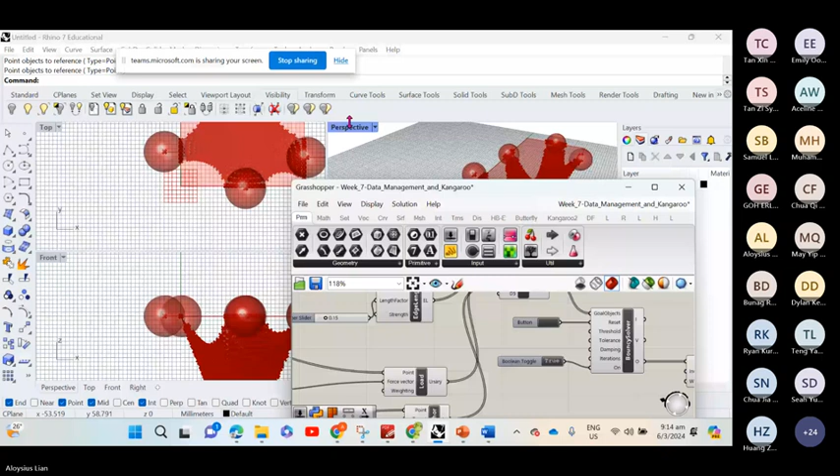Okay, so to make it visually interesting for you all, this is what you will learn at the end of the lesson. This is a Kangaroo simulation. Essentially, you will learn how to do this kind of simulation, form finding exercise.

Physics simulation means that it will just react to the physical world elements, for example, gravity, simple forces. We will share with you how to do Karamba later on - that is a more precise structural analysis tool.

So this is a parametric system. I can move this angle to here, and I can reset the analysis. This can be useful for landscape design students, right? You can make a nice slope design. We can always reverse the direction and make it positive so that it becomes a structure instead.

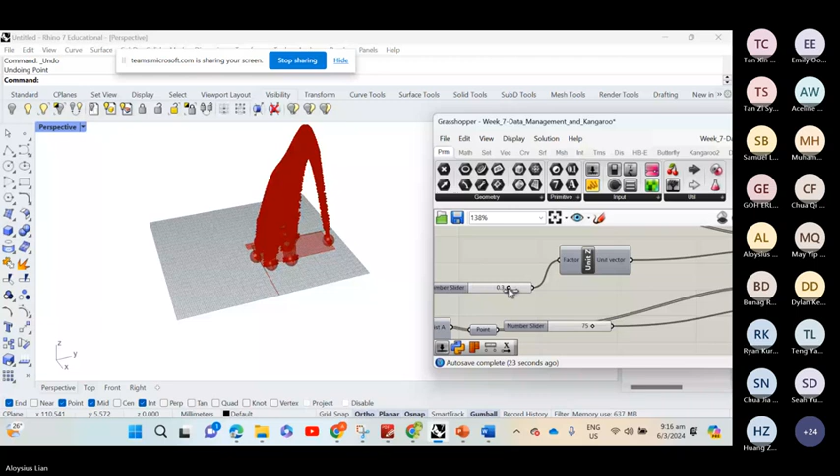Maybe this is too strong. Yeah, and you can see this kind of interesting results. So you can reset the simulation again.

Towards the end, you can really directly make this into an architectural element. So if I were to enable this now, you'll be able to see the structure. So this will be the completed structure based off on your analysis.

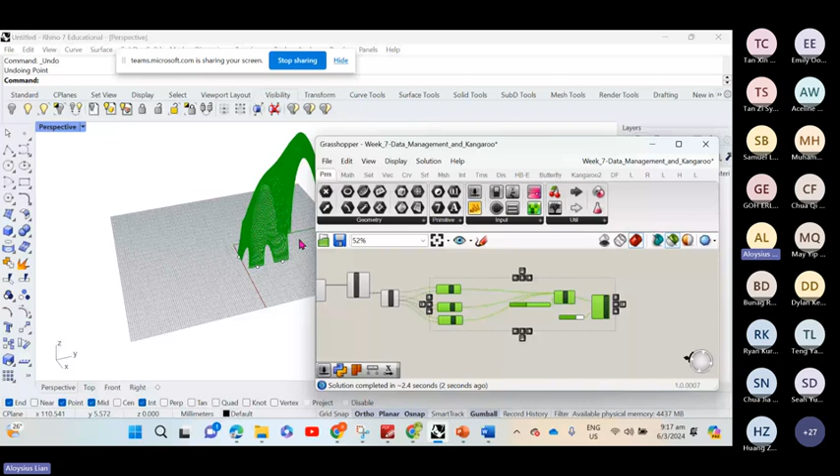Something similar to what we have learned from the Esplanade cum Jewel lesson, right? And then that is the end result of the lesson.

But the first part that we will go through very patiently and slowly as requested is the data management. Because, for example, now we have created so many pipes and structures, right? So how are we going to manage them for fabrication, for data?

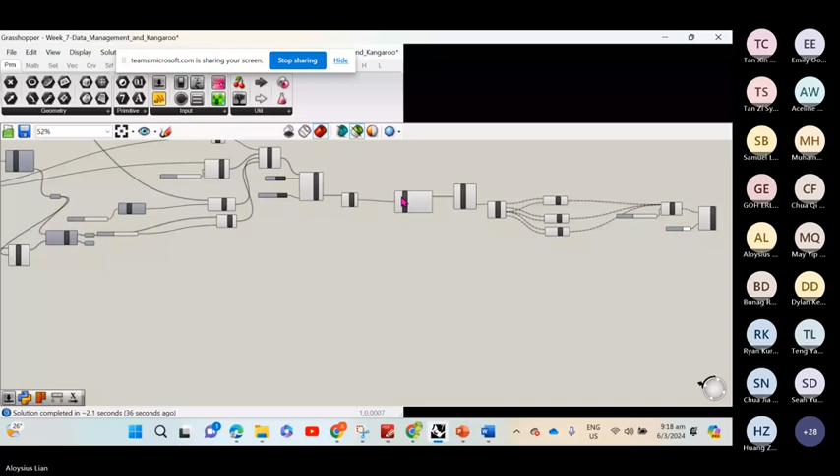My computer is hanging because there are too many elements. Let me just disable it quickly. Okay, so now it should be faster.

So the first part of our lesson will be about the data structures - how to generate a series of points, and then after that, read and write and create a list of points that will generate our landscape over here.

So during the hands-on in a few minutes' time, we will create a rectangle. We will make the rectangle a mesh, export the XYZ values to it, and then after that, use Excel to randomize the heights of the points. And we will read these new values from Excel into Grasshopper and then create this mesh.

So why am I doing this roundabout way? Because you may have your XYZ values from somewhere else - for example, you have it from a point cloud that you receive from a surveyor. So you can ask your surveyor to give it to you as a CSV file, and then you can directly translate that into a terrain in your Grasshopper or Rhino model. Okay, clear?

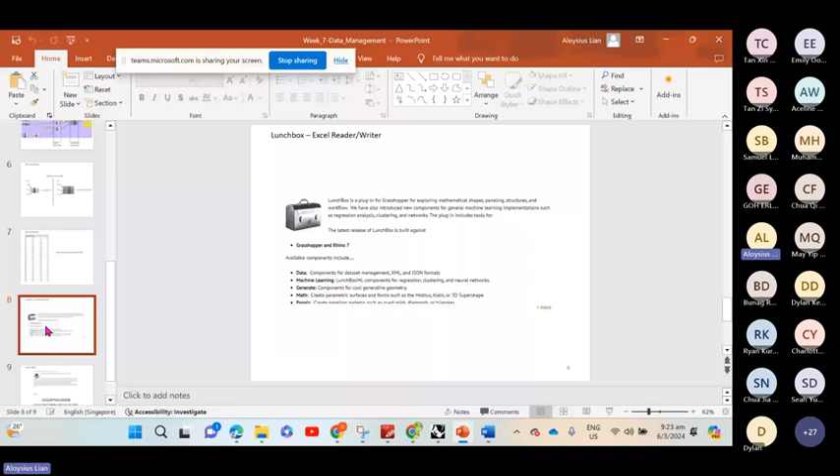There is a plugin called Lunchbox which automates this for you. But we teach you the fundamentals so that if you don't have access to a plugin, you can still do it from vanilla Grasshopper. At certain firms, there may be system administrator issues preventing you from downloading plugins. So to circumvent that, if you use the vanilla installation, you can still operate as is.

There are other plugins available, for example Bumblebee, but this is not supported recently. I think he has moved on with his life. As of now, I think it only supports up to Rhino 6. So when you use it in Rhino 7, it can still be done, but not so smoothly. There may be some bugs.

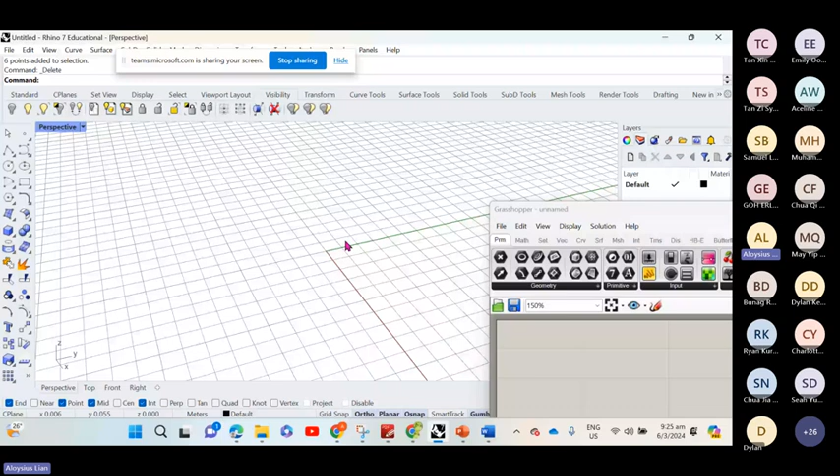Make sure that in your Rhino file, your units are in meters. Type units, then meters. Make sure that meters is selected, and click OK.

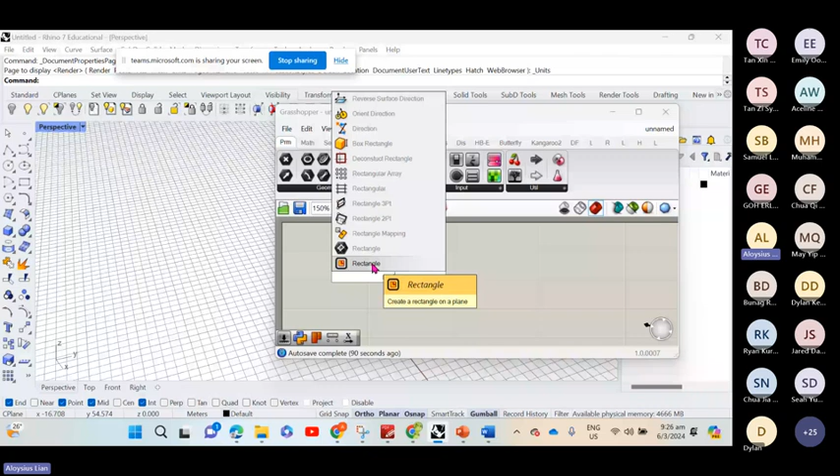Everyone have this? Now we move on to Grasshopper. Double click on the canvas and type rectangle. Choose the last icon, where it shows a black border around an orange color square, even though it says rectangle. Click on that button and you will see this come up. It needs a plane. The default plane is already the XY plane. What we are going to do now is change the X and Y size.

I will input 30 meters for X. I double click on the canvas and connect it to X. So we have 30 meters to the X direction, and 60 meters in the Y direction. Just double click, press 60, and connect.

I will zoom out, and now you will see a rectangle that is 30 meters in X and 60 meters in Y.

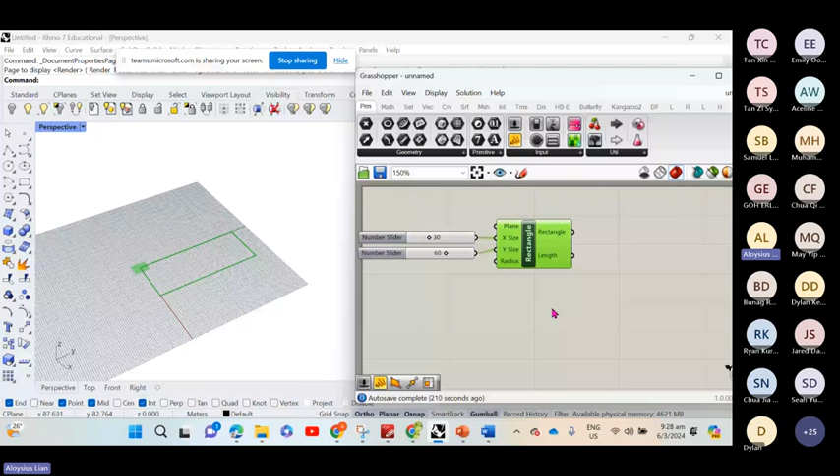As I've explained before, we are just creating a generic rectangle and a generic mesh from the rectangle so that we can export. Oh, why you frown? Don't frown, girl, you get wrinkles. Too fast? I'm really trying my very best to be uncle-ish and slow while not making you sleep. She was frowning very intensely, like questioning why the rectangle must be 30 by 60.

Everyone have rectangle now? We are going to do mesh plane. Create a mesh plane. There's two options here - this one is trying to catfish you, don't choose that. Choose the second one, without the vertical thing in between.

So this is the mesh plane. What you need to do now is connect the rectangle to the boundary. This allows you to calibrate how many mesh subdivisions you want within the width and height.

I'm just going to be lazy now, I'll move this down. And I connect this, the same X to the same width, the same Y to the same height.

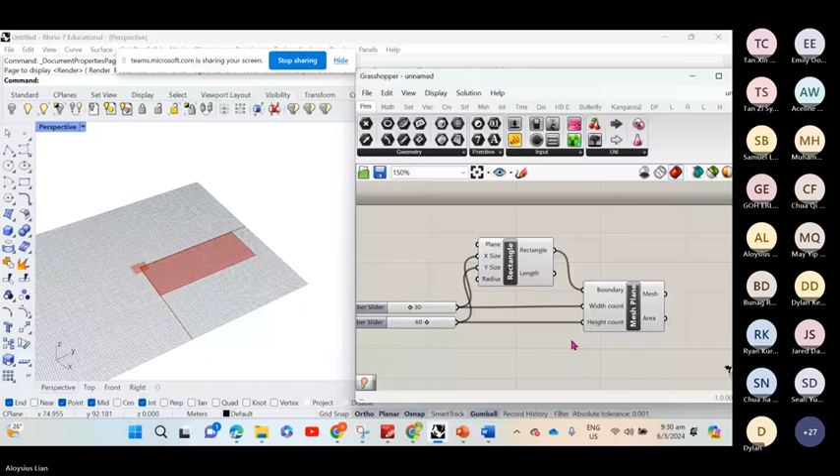I repeat: double click, type mesh plane. Don't choose this one, choose this one with the orange rectangle. Then connect the rectangle here to the boundary, and the same X to width and the same Y to the height. Everyone okay? Same thing as throughout the semester, your TAs are your friends. If you don't know, just raise your hand and they will come to you.

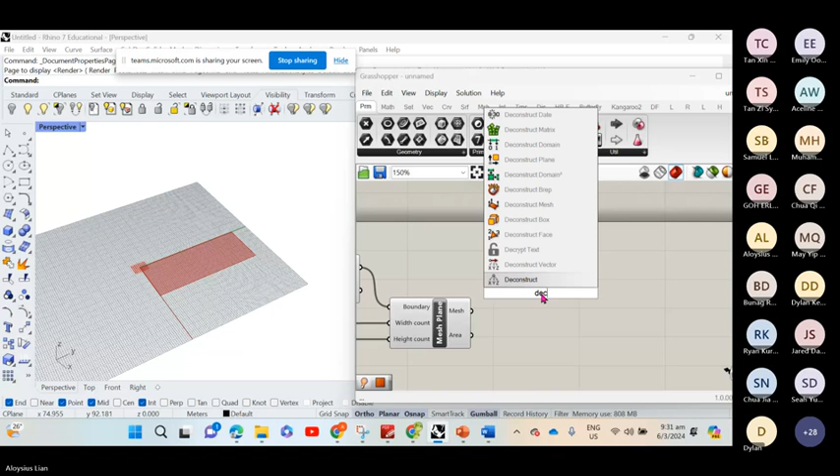Now what we are going to introduce is this command called deconstruct mesh. It is very similar to the same concept we told you before for the explode tutorial, the deconstruct BREP - it's just a different geometry, but you are still deconstructing it. Click on this and connect your new mesh plane to your deconstruct mesh.

If you were to zoom in now, you will see essentially that whatever is on the mesh plane is now on your deconstruct mesh in terms of the vertices. It has divided it by 30 divisions here and 60 divisions here, in 1 meter intervals - that's why my grid here is 1 meter.

Okay. So, why we want to do this thing is because we want to just get XYZ points. I've just created a panel and connected it to the vertices. Okay, so now this is giving you all the X, Y, and Z values of each of the points that we have generated. So the first thing here is X. The second thing here is Y, and the third thing here is Z.

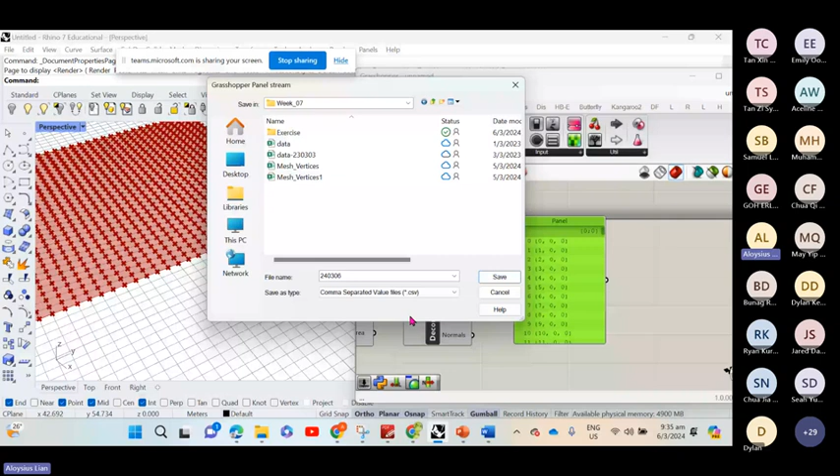Okay, but this does not create the new file now. It does not exist here in this folder that I've just said that it will. What you need to do is you have to still do this next step, which is to right click and then stream the contents. Now I click here. If I were to go back over to this, you will now see that my CSV file has been created. So within a very quick 5 minutes, you have already done some data management, because you exported a data file.

When you double click on a CSV file, Microsoft Excel will naturally detect it and separate all the commas into the columns. So now when I double click on this file, you can see that it has exported the information. And why I say this is a negative demonstration is because if you were to scrutinize, the values for column A and column C are not so right. You will see that there is a curly bracket. Because the computer is strictly by the book. Whatever is on the left and right hand side of the comma, it will separate. If it's a curly brace, it will also separate. It doesn't know that this is just a bracket to contain the XYZ value of a particular point. So this is where we need to do some data management, data sifting, and data splitting.

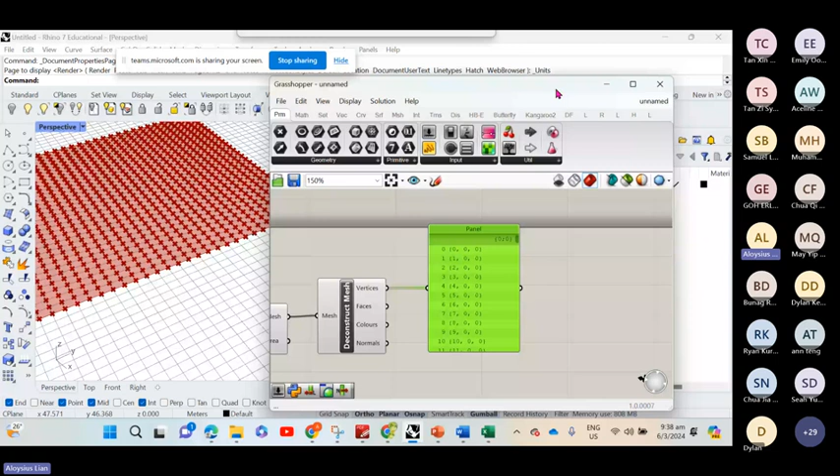At any point of time, if you are confused, you can go back to the file here. It's on the top. My data management part is on the top here. From this end onwards, deconstruct mesh, then we will deconstruct the vertices, the point to XYZ, and then we will concatenate, we merge, and then we will read the file. Oops. Okay, I go back here. Everybody okay? All have this CSV file? So I'm going to close this now, and then I can move it up.

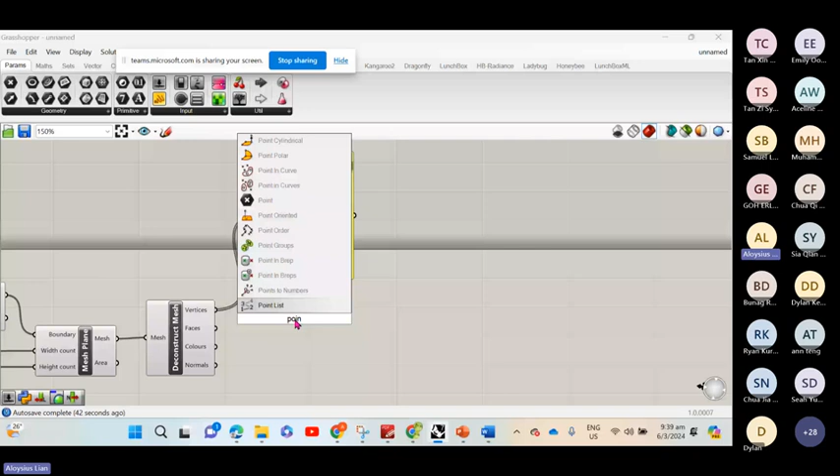So we already said this is a negative demonstration. So we want to convert it into just the XYZ point. To do that, we need the deconstruct point. Yeah, this one. Deconstruct a point into its component parts. You click on this, and then now you connect. I will just open a panel and connect this here. So now you will see that you take all the X values, then all the Y values, which don't increase, as well as the Z values. Okay? Can?

So now this information, we need to label it, correct? Because, for example, if you create this CSV file, you may forget what these values are, what the first column, second column, and third column are. So you will need to create a header for this. So I'm going to make a panel, and I double click, and I just call this X, Y, and Z. Then click outside. Don't press enter, because when you press enter, it will make it into a new list.

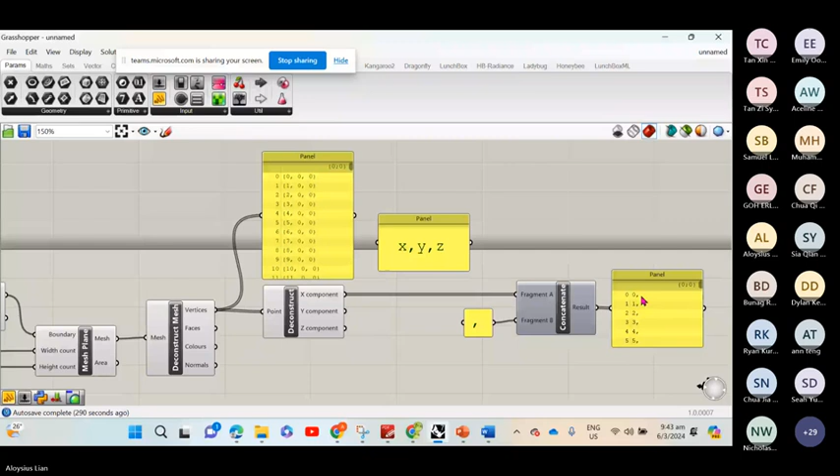I will reduce this, and I'll put this here. Now let's see what happens. Okay, I'll just show you. I create a panel. You see, it will add a comma behind every value here. Understand? So this is what concatenate does.

Now, you can zoom in to your concatenate. Then you can click on this little plus thing. You will add in another input. Okay. So I will connect my Y over to here. Do you notice what has happened now? It has added the other column of values in.

Okay. Then now you zoom in and you add plus again. Now I just want to connect. I zoom out. Okay. I also need a comma here, right? After my Y column. Makes sense, right? So I will use my same comma here and connect to this. And you notice what has happened? It has added another comma here.

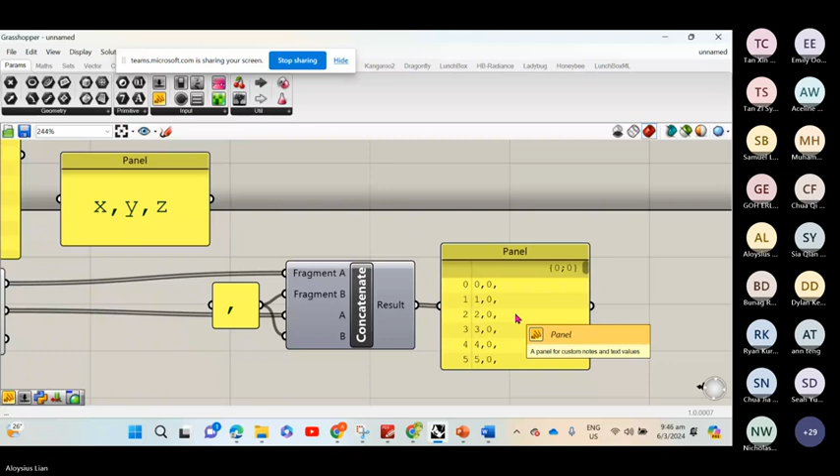Okay? All okay. So now I will zoom in. The next step is quite obvious, right? I will add another input. And I will simply need to add my Z as a C input now. Okay? So now you get what we wanted, right? Without the curly braces, and I'll move this here.

Okay. So what is happening now, and just to let you all understand about data structures in Grasshopper, right? Do you notice this funny thing here, 0, then semicolon 0? By default, Grasshopper always tries to make this into branches, so to say. Okay, this may be a bit abstract. I'm going to use this thing to show you. Double click on the canvas and type param viewer.

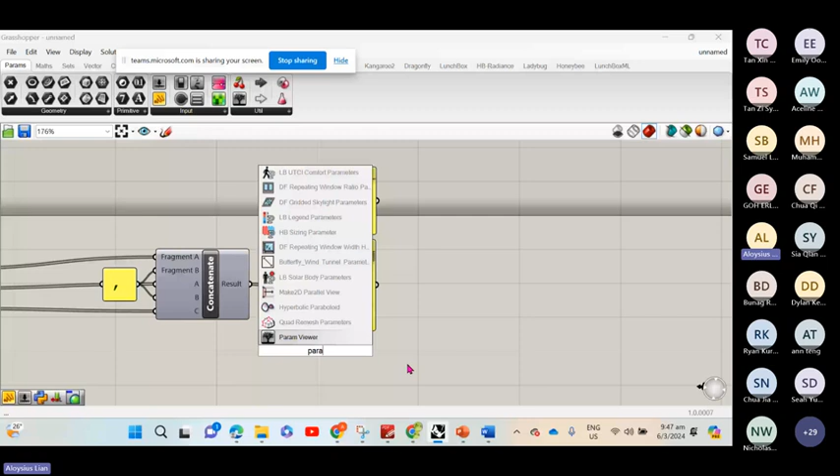Later we will come to this when we have more data. Okay, so you should see this thing. Connect this over to here. Okay, so this is what I mean by data with one branch. By default, I'm just going to make it even more visually appealing. You right click and you click on draw tree. This is what is happening.

Okay, by default, Grasshopper always tries to make your data into a tree, a data tree. There is a branch for this. But technically, you don't need to have this as a data tree. When you right click and simplify, this thing will still be the same. Okay, because this is already in its simplest form.

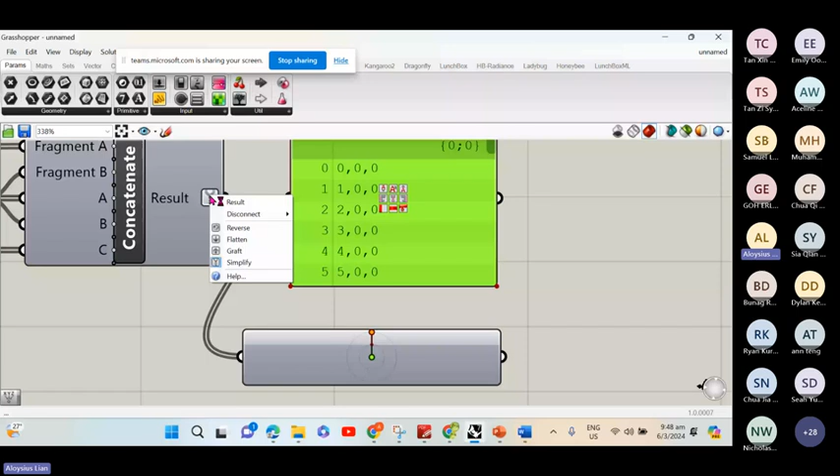Later on, when we go to more complex data structures, you will see this portion becoming really like a tree. Let me scribble. You will see things like this, and this, and then another data. And then from here, it can even branch off to further data. This is especially true for

our Esplanade tutorial. Because in our Esplanade tutorial, remember the time when I showed you all the example, we focus on one item in the deconstruct BREP. And then when I override that, the whole surface is proliferated with the sunshade. It's the same thing. What we have done for that example is we focus on one part. Once you finish this, all the branches will be applied to.

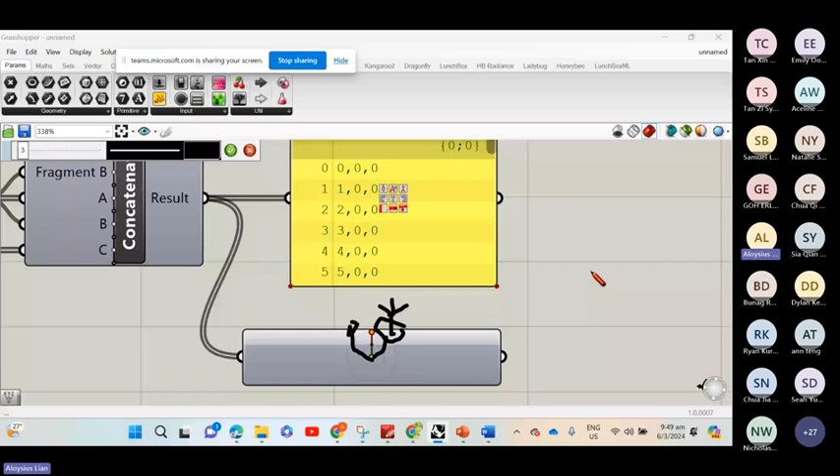Okay, this one is still very abstract, but never mind. We will come to that later, and then you all will be able to understand visually. So why do I show you this? Because now what is happening is there is one stream of information here and one stream of information here. We want to merge them together.

Okay, so we will use the merge data stream. So use this last one over here. And then I will click. Okay. So you will merge this one with this one. And then now let's observe what is happening. I just copy and pasted this panel to show you what is the new output.

So you can see here now, there's one data stream here and another data stream here. They are organized in a different way, but when I put this inside here, it still is to the same division. Because to Grasshopper, 0 is the same as 0, 0. Only when it's 0, 0, semicolon, another 0, then it has branched off.

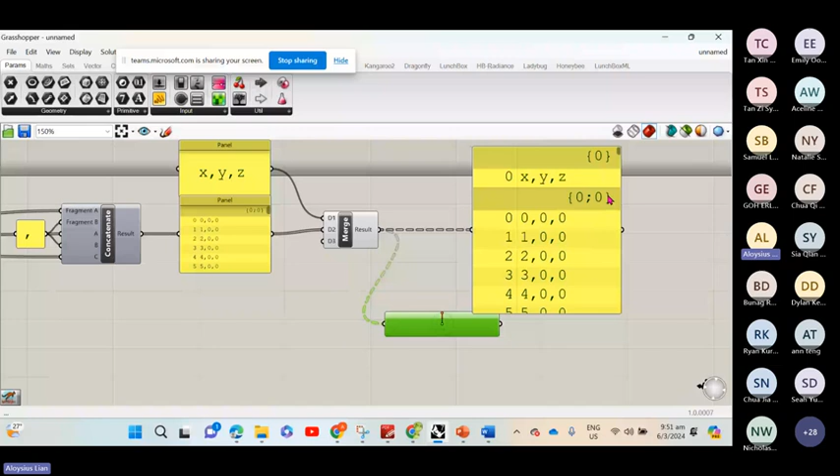Okay. And now you will also notice something very peculiar, correct? Originally, our wires here are single line. Now, they become this dash line. If you don't see this, that's probably because you don't have draw fancy wires turned on. You can click on this and you will have this. So this is with fancy wires turned off, and this is with fancy wires turned on.

This is just to let you as the computational designer understand what kind of data is coming out from each of the components. Okay, so this is when there is already a certain form of data streams. There's two streams of information. If you see here what I've just done, I right click and then I flatten. Can you see here? Sorry, must make it like an action replay. This one line, correct? No branch.

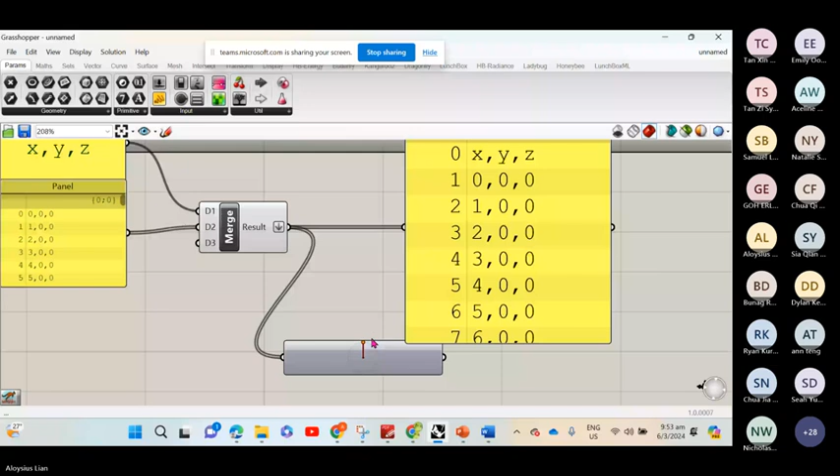I right click and I unflatten. I zoom in. There is a branch. So that's why you see this is with the dashed line, because this is a branched data stream. Okay, this may be a bit abstract to all of you, but let it sink in your head. I will not insist that you all will know this, but just understand that Grasshopper tries to organize information into branches and trees.

Okay, I'm just going to flatten this now. Now it's all neat. So you have this and you have this. So then now what I'm going to do is I will right click and I will do stream destination. Again, I want to create a new file. So I will just call this today's date, and then I will type X, Y, Z. You can name it whatever you want. And same thing, remember to save it as a type CSV file. Then we save.

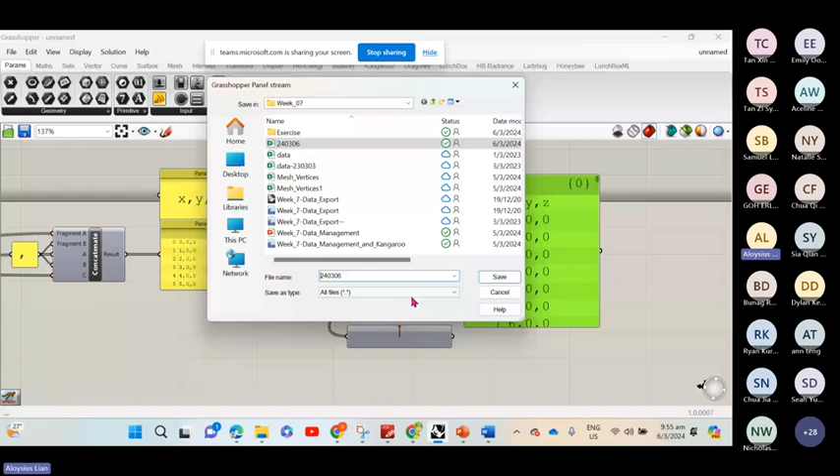Okay. Oh, it auto changed this. Dash X, Y, Z. So as you all know, I repeat again, it will not create it first. You are just telling it, I want to name it this way. But you still have to right click and stream content again. So stream content, and then now you will see this. Then you double click. And now you will see this is cleaned up. No more brackets meshed in together. And you even have the headers here.

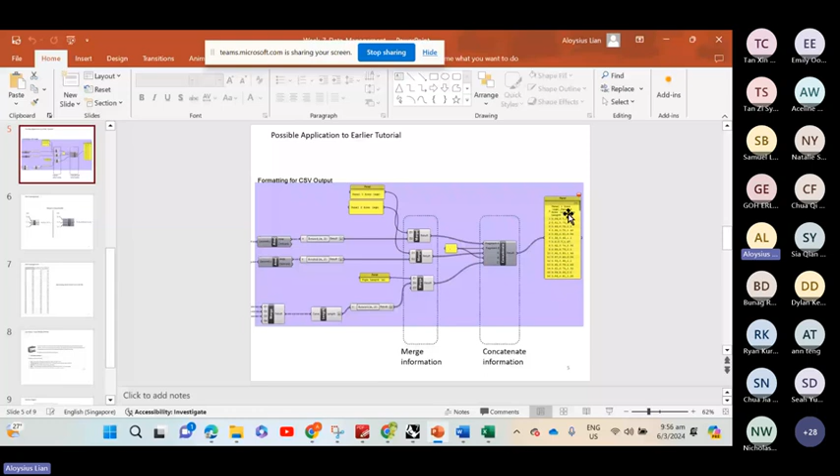So effectively, what I've just done is I've taught you also how to do this. There's a lot of labels that you can put. Instead of putting it as XYZ in these notes that you see here, we can call this panel 1 area, panel 2 area, for the earlier tutorial, or the pipe length information like this. But today I'm going to benefit the landscape architecture students more.

So now that we have all these x, y, z values here, I'm going to simulate a situation. For example, when you get a survey file, a terrain file, it's not going to be flat consistently. Nothing is consistently flat. So I'm just going to use Excel to randomize the numbers, to simulate, for example, you receive a point cloud file or you receive survey information with platform levels. So I'm just going to go to this. Let me just zoom in so that you all can see.

Over here, I will make it into a formula. I will press equals RAND, random, and I want it to not be any random number, because otherwise my site will be like my blood pressure that go up, go down, go up, go down. So I will put it as RANDBETWEEN. And you have this bracket. So it will be between the lowest number. If we think about it from the 3D point of view, our lowest value will be 0, where it's on the plane. And then our highest value, let's just say it's like 3 meters. So from 0 to 3 meters.

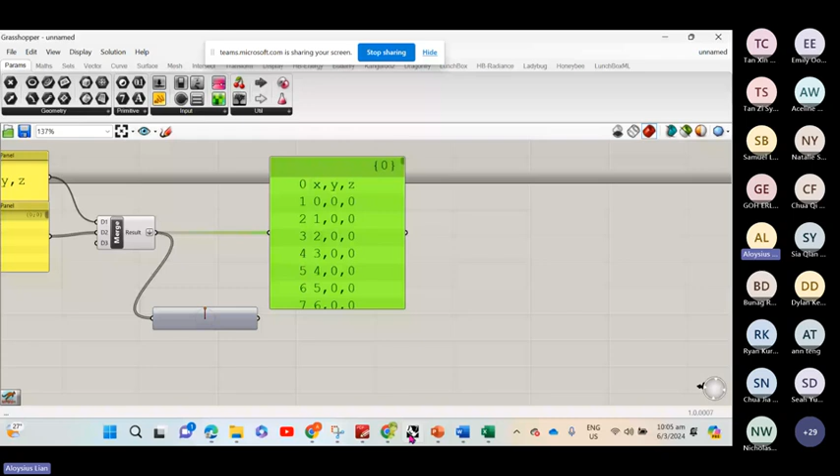Okay, let's go back. Okay, here. So we have this already, right? All have this. Now we want to read the information back. It's the same thing. In the notes it's here. I will teach you why this is red now. Because Grasshopper is written in C#. And C# is like a variant of C that is for Microsoft based programs, like Windows based programs.

So it also means that if you have Excel open at the same time when you are running this, it will hang or you will have an error. So just always make sure that you close your Excel before you read or write information. Like just now, when we wrote the information, there was no Excel open. And now if I want to read the information, I close this. I've already saved it before, so I just click don't save. Then I will read the information.

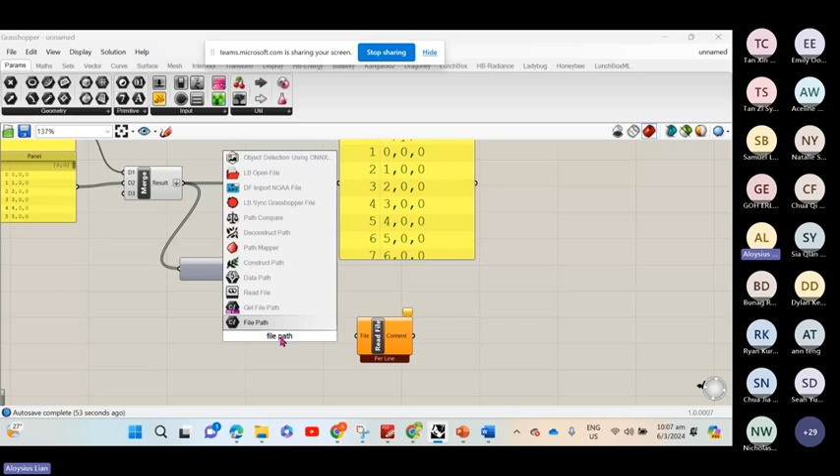Okay, and then now we will connect this over here. So we need to tell it where this file is from. So you right click here and you select one existing file. And you will choose your random file. Make sure your Excel sheet is off. Otherwise, you will see that it's red. So click. And that's done. Now, I will create a panel and I connect this. Oh, no. Let me just use the same size so that you all can see. I just copy and paste.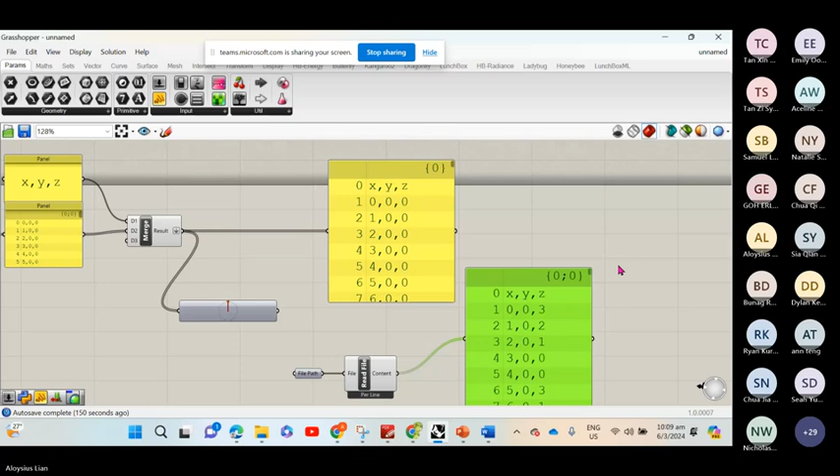Okay, so now you just have a basis for comparison, okay? What we started off with was our flat plane of values, correct? I go to Excel and I change the information. You know, it's like money laundering. You take this, then you change the location, and now you have a brand new set of Z values from Excel. Okay. So now I have all these nice new values here.

And what we need to do now to make it into points is we have to take out the XYZ again. So if you use the analogy, it's like you're trying to launder the money. You put it on the crypto exchange first, then you change, then after that you put it back into dollars again. Okay, so how do we do that? We will split the list.

Split list. Okay, you split the list. So I take my list over here and I need to split it. They will ask you where to split it at. Okay, so it's very easy. I want to split it from here onwards. Right, this is my first item. Again, another reminder, right? To Grasshopper, it starts counting from 0. So I want to split it at index 1. I just press 1.

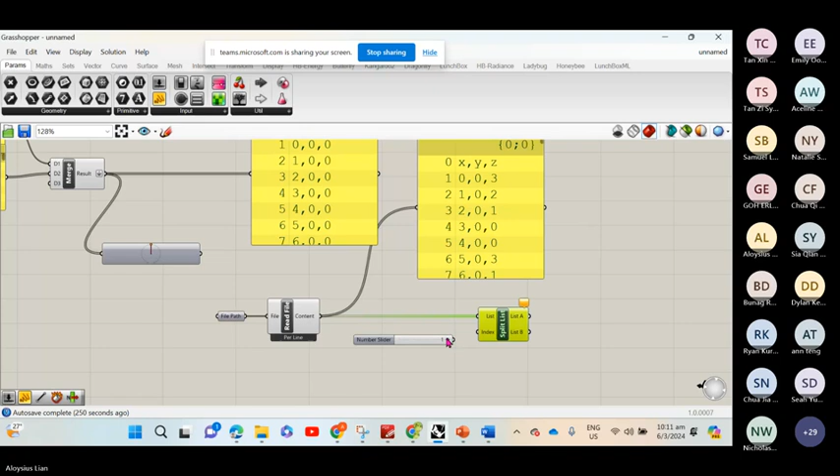Okay. And then I connect this here. And I copy and paste this. And I check. So this A is the one that you split off from. And this one is what you have. Okay, so I've split off from the first index. So that's why the XYZ is in list A and the rest is in list B. Okay.

Some of you may question now, wow, Prof, why you spend 1 hour and 10 minutes doing the same thing again, just to change the values. But this is just the fundamental techniques, right? How you auto-generate values, how you merge the value, export it out, and then from there on, you can do whatever you want to do in Excel. Or you can skip the first step. You already have the Excel information. When you read it in, you will know how to adjust this information, remove those that you don't want, like the headers, and just give you the content over here.

So that then now you can take these values and create your point. Okay? Clear? All have this now, right? All back to square one again. Okay?

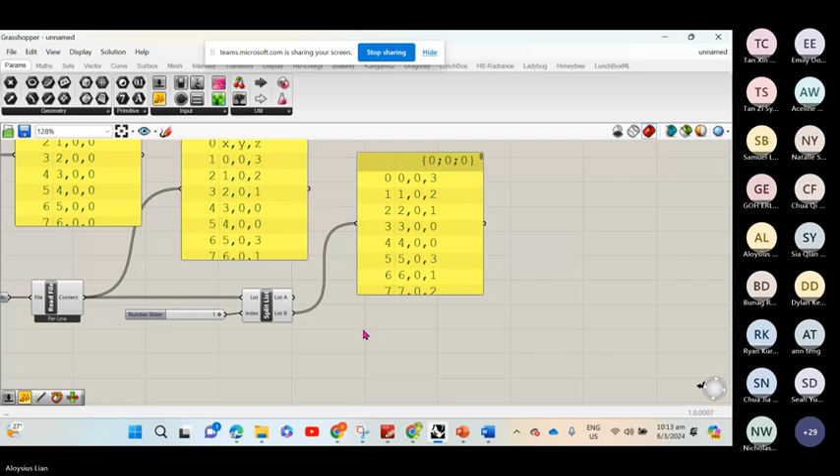Now, the next thing that we will do is we will text split. Okay? Text split. So it's really exactly the opposite of what we did with concatenate. Okay, so I will push in my text over here from my list B. And my separator obviously is my comma, right? So I just go back there and copy my comma in. Control C, Control V.

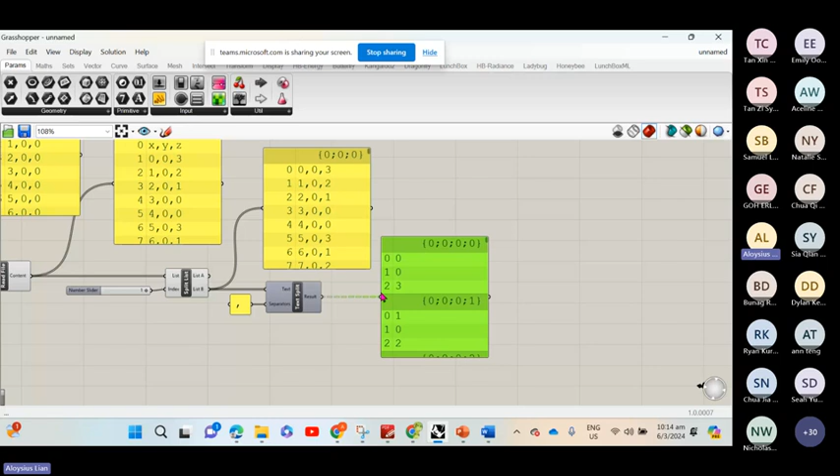And I connect this in here. And now let's see what has happened. I'll Control C, Control V again. And let's see what's the result. Okay. So the important thing here, right, is that you can see that the good thing is Grasshopper is storing it into their own packets. So even after you have split it away, they are still in their same packet.

This is a verbose way of Grasshopper when you start off with one simple index. After you split, right? So same thing, just now you have a tree, you branch off. When you change the tree, you split the tree, it will auto create another branch. That's why you see from here, it becomes like this. But regardless, right, they are all still in their same packet, which works well for us.

Because now, what we are going to do is we are going to use our good old friend, the list item, right, to extract the first, second, and third value of each of these packets. Okay? To put back in to construct a point.

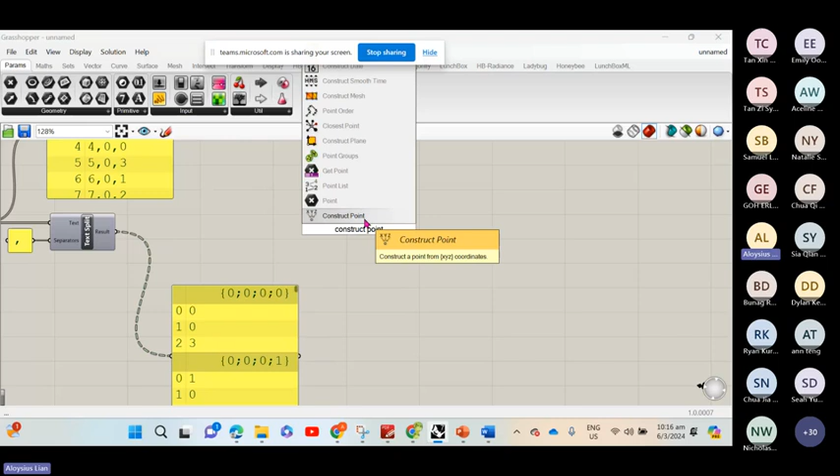Okay? So before I even go there, I just type construct point. This is the command. It's called construct point. The construct point needs an x, y, and z value, which will be this x, y, and z value, which is actually from here, right? Let me just scribble again. So this guy is the same as this guy. It's just that you took away the commas. And now you want to make them go individually here. Okay, understand the logic?

So we will therefore need to use the list item, our good old friend here, and connect this here. Okay. I will again just use this to show to you. Once I have done this, you can see here that it will start this 0, 1, 0, 1, 2, 3. You will take the very first number of the sequence.

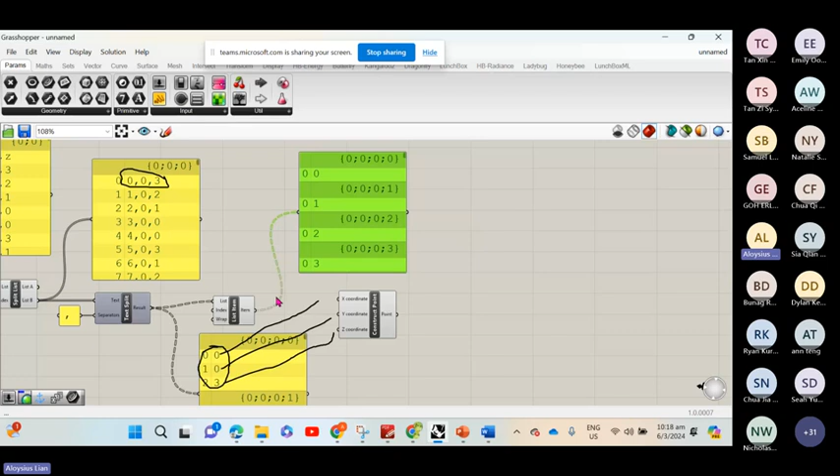And now this is the part where I will show you something further to our good old friend, which I have not shown you before because I didn't want to confuse you. But today I will confuse you. I will zoom in here. See? You can see your items, right? Last time I always showed you, you copy and paste. You have one for every index, because you will label the index here, right? Now that I see that you all understand that concept already, you can press plus here.

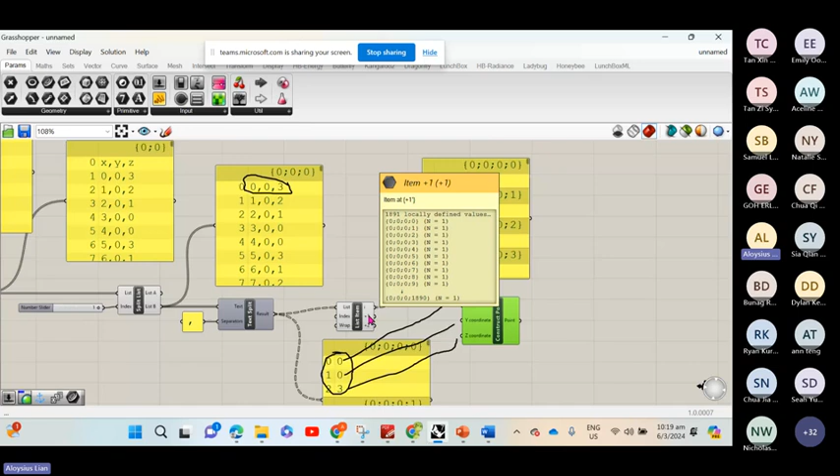What happens is it will take the original index. Here by default, hover here, is 0. The next one, when you plus here, will be plus 1 of the original value, so that will be 1, and the next one will be 2. This is useful when you've got a lot of spaghetti in your grasshopper code. When you're confident, next time you can do the explode tutorial, split, deconstruct the BREP, get the vertices, and use 0, 1, 2, 3 for all of the 4 points of your deconstruct BREP.

So with this logic, I just connect this to X, this one to Y, and this one to Z. And you will get all the 1,891 points again. Why? Because the first row is XYZ, even though there were 1892 values. So I go back here again, and you will see this is your beautiful new set of points.

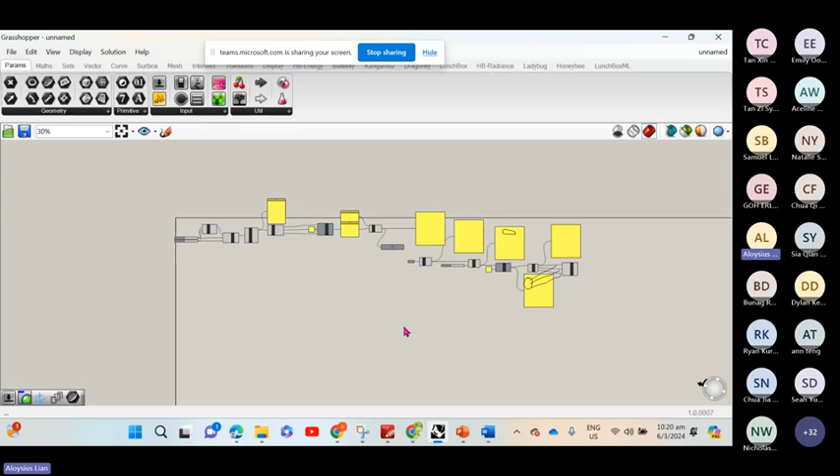To make it neater - okay, I'm just going to hide everything else. Just select all of this. Oh shit, I don't have a middle mouse button. If you all have a middle mouse button, you can hide them. I will just hide them manually here because I didn't bring the mouse.

So this will be my new randomized points from my CSV. It's like when you read the newspaper and there's money laundering - nobody will know where the points are from because now they're all randomized.

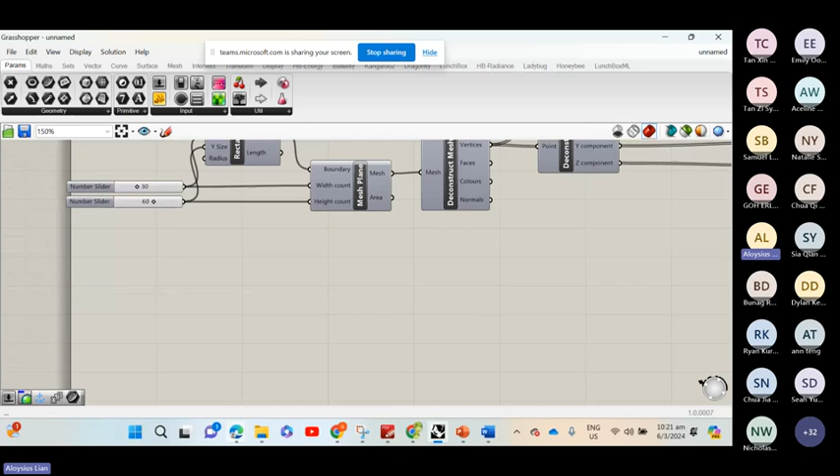But what we are going to do is make this into a terrain. With all these points, because originally this was from a mesh - the mesh was constructed with a width count of 30 by 60 mesh plane, that is flat. Since now we have a lot of three-dimensional points, the most efficient way to create a mesh out of this is to use a Delaunay mesh.

This is a mathematician who found out this geometry of triangulation. So just type DELAUN - it's like money laundering, D-E-L-A-U-N. Click here, and you connect the points.

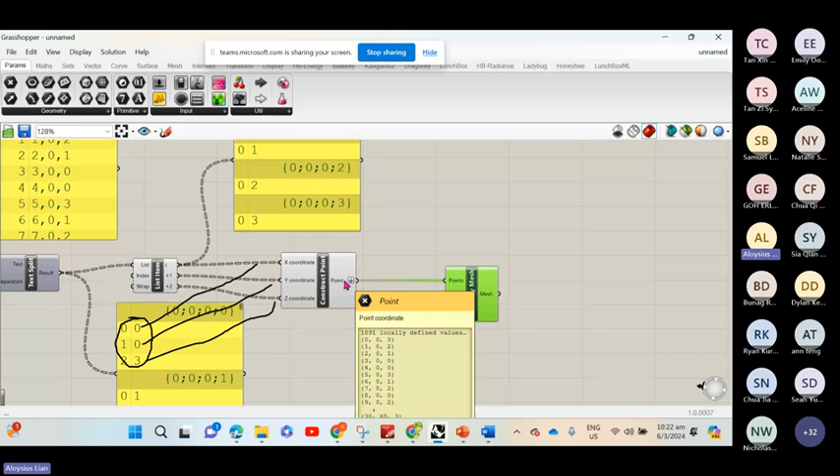It didn't work just now because it was still in its convoluted data structure, since everything was stored as a packet. So when you try to create a Delaunay mesh, it will just create a mesh out of one point. You need to flatten it so that it becomes part of one entire list. So what I did just now was right-click, flatten, and connect it to the Delaunay mesh.

So ideally now, wait - okay, I will hide this and I will see this. Yeah, okay, so this will be your mesh.

So you see now this is a bit cranky, right? Doesn't really look like a geometry, but this is just to show you the extreme examples. I can always go back - I go back to my XYZ random and I can change my formula.

So now I'll just change the formula to equals RAND BETWEEN 0 to - let me make it more conservative - maybe even 1. So it'll definitely be quite smooth. Enter. And then now I will just drag this on for all the other values.

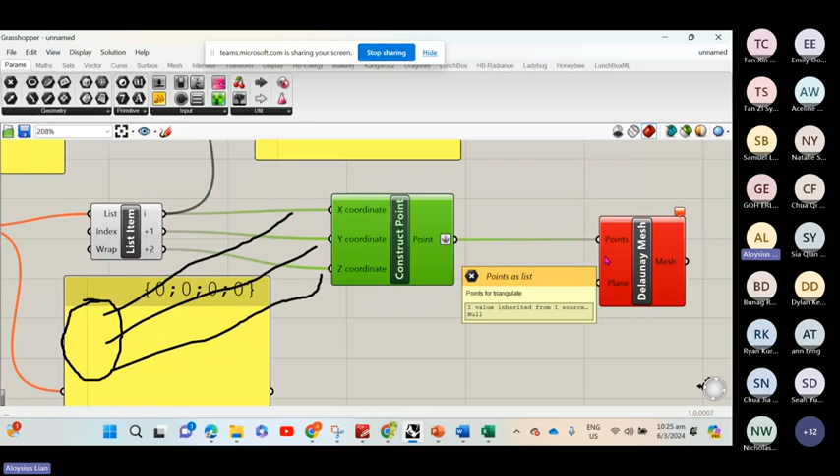I purposely do this so that it's also a negative demonstration for you, to show you that the file will - I'll save this, click yes. You go back to your Grasshopper and this guy will turn red. Why? Because you cannot read the file while you have the CSV, the Excel sheet, open.

Don't go home and tell your parents your professor taught you how to launder information - this is just to tell you how to manage your information.

You created a rectangle to generate a mesh. From the mesh, you got points. You go to Excel and adjust the information in Excel. You brought it back to Grasshopper again, and with this information, you created a new topography. Practical applications: next time you get point cloud values for landscape architecture students, you can take all these heights and apply them according to the spacing in your grasshopper file, and then you will generate your terrain already from the points.

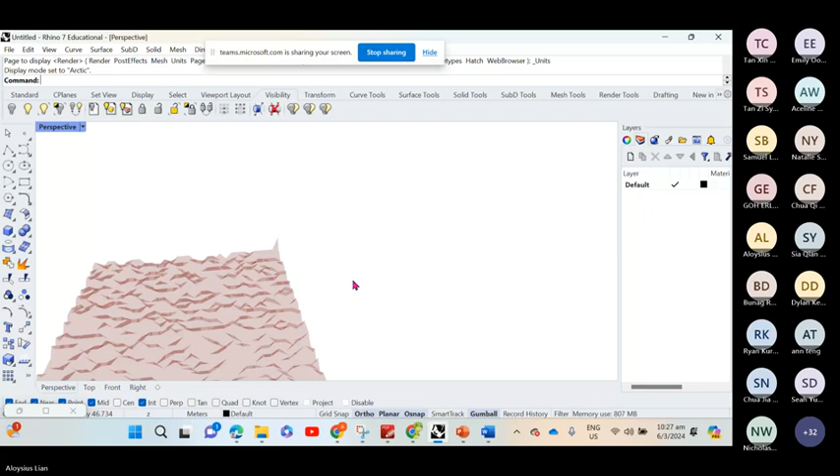Okay? Everybody clear? All clear?

Okay, so to relax, I will show you all a video. Then those who are still not so sure can relax and watch the video. Okay.

We are going to move on to kangaroo, but before that, let's relax with this video. Because the funny thing we did with the falling balls and creating fancy structures actually makes sense - in this video, we explore arches and chains.

Arches are popular and beautiful structural components. You know where to look - you can find them in bridges, buildings, tunnels, wells, dams, and many other places. Chains are also used widely, found in lifting equipment, playgrounds, and many other settings.

Close parallels exist between arches and hanging chains, and since chains are easier to understand, let's talk about them first. Consider two chains side by side - one light in weight, the other heavy. The weight of a free hanging chain does not affect its shape, but the spacing of its ends does. Each shape in this family is called a catenary, and each catenary is similar to a parabola.

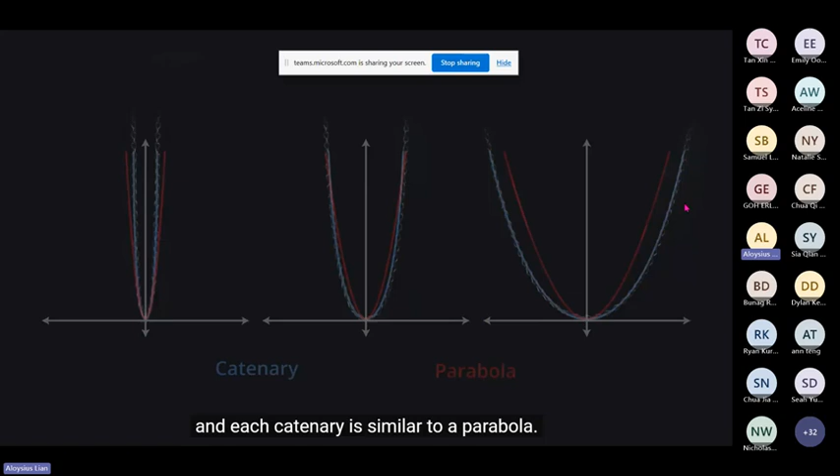If we add external loads to a lightweight chain, its shape changes considerably. What do you think will happen if we add the same weights to the heavy chain? It turns out those weights have little effect on the shape of the heavy chain.

Chains are often referred to as tension systems because each of their links carries tension. No bending forces or moments are transferred from one link to the next. If we make a mirror image of a hanging chain, we get an arch. In an arch, the component pieces push against each other, unlike chain links which tend to pull apart.

To ancient builders, this represented a huge advantage. If they placed a bunch of stones in just the right positions, they would push against each other and stay in place. This made for structures that were both simple to construct and highly durable.

Here is another difference between chains and arches. Because chains are tension systems, they automatically reshape to better carry whatever load is applied. Because arches are compression systems, they do the opposite - so if they are not shaped appropriately for the loads they are asked to carry, they can collapse. As a result, designers must tailor each arch to the loads it will need to carry.

And how did we figure out the shape for the arch? That was easy - we just hung it upside down so it worked like a chain system, applied the loads, and maintained those angles when we turned it right side up.

In the late 1800s, a famous architect named Antoni Gaudí used exactly this technique to design the arches of the famous Basilica of the Sagrada Familia in Barcelona, Spain. To figure out how to shape the arches, he built a precision upside-down model of the basilica.

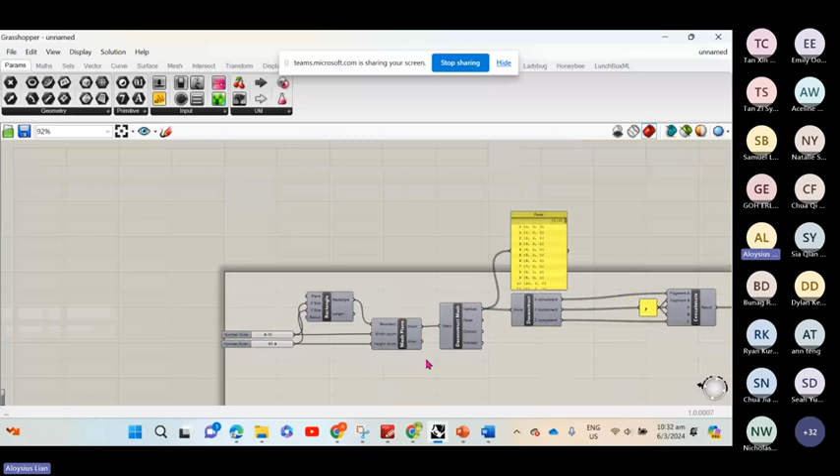Okay, so the rest of this, actually from here onwards, I don't need to use for now. This one is just for the data management part of the lesson.

I'm going to right click and disable it. So the difference between preview and disable is once you disable it, it will not do anything - it will stop it. It's like when you have a river and then you dam it up. That's what it does, same thing here.

I also don't want to read any information, so I right click and then disable. So all of this stops functioning from that point onwards. I'm going to move this down. Okay.

Okay, so just so that you can visually see something, I will...

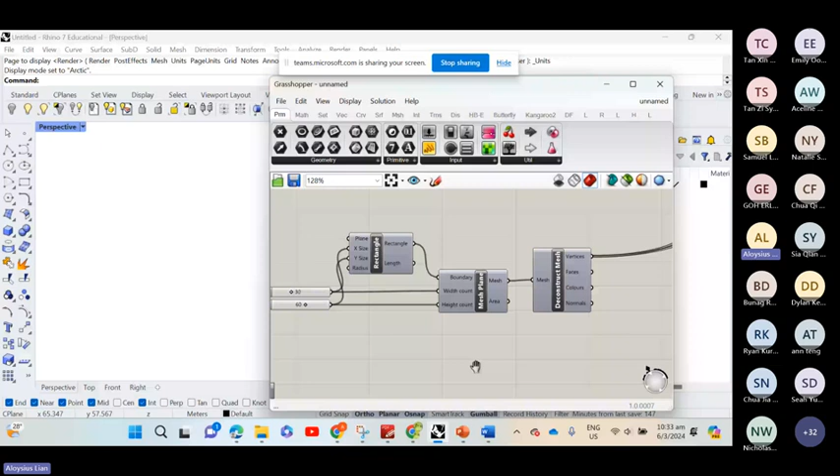Okay, what I've done is disabled the rest. And now I focus on the mesh plane and the deconstruct mesh. We are going to use this mesh to simulate the same experiment that Gaudi did many years ago for this. Last time, they had to construct this manually. Now you have the benefits of using a digital model.

Okay, so you just imagine all of this as a mesh. All of these weights are your mesh points. So I will right click here and preview. Okay, so these are all my mesh points.

Okay, now what we need to do is, remember from the video, we need to anchor. These are the anchors here and here. So we want to tell Grasshopper where to anchor from, and I want to do it interactively.

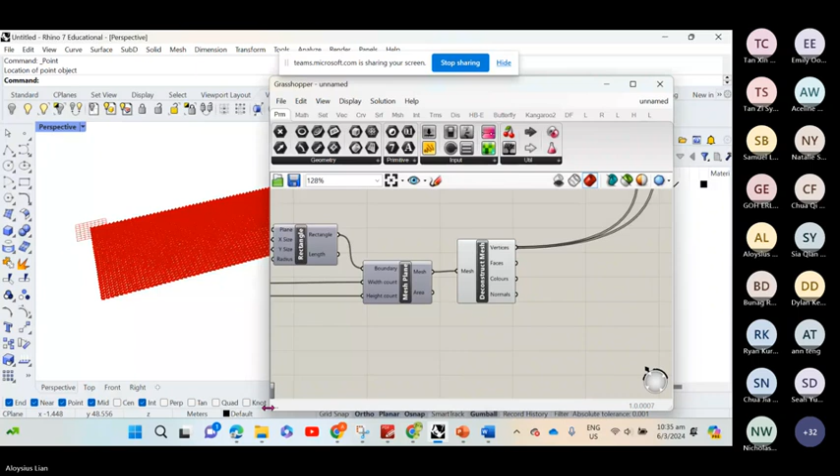Okay, so I drew 2 points here. I'm going to draw another point, another 4 more points. So I'm going to click here, point. Click here. Here. And here. So for a total of around 6 points, generally in this location. So use this tool to draw 6 points.

This will be the points where we will be anchoring our model.

Okay, so firstly, I want to go to Grasshopper and tell Grasshopper that these are all my points. So I will double click and select the point tool, P-O-I-N-T. Everybody have point now? Everybody have a lot of point here and then one point thing here.

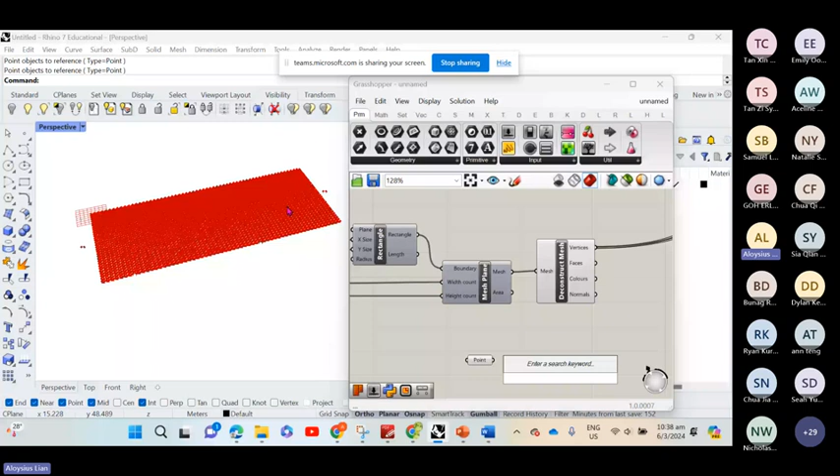Okay, so now what we're going to do is these points are just reference points for us to grab some of the mesh points for them to be the anchors. Because I don't want to just have one point as an anchor, it will look very weird. I want to have a series of points here.

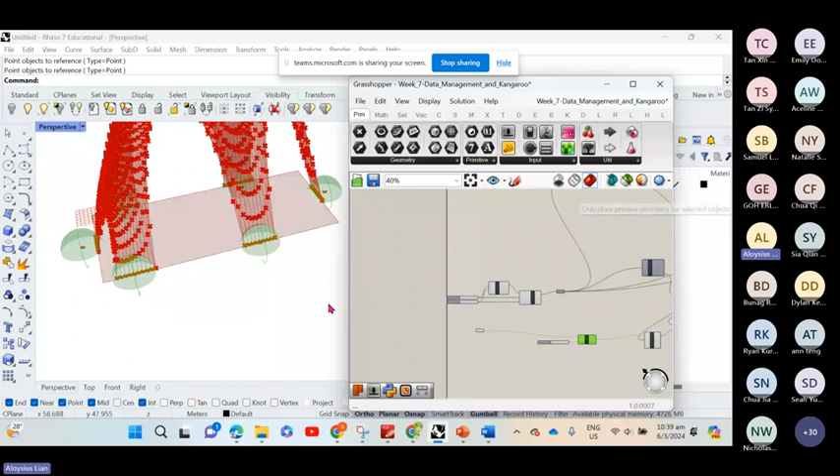So the analogy is that if I were to just go back to the example here very quickly, then you can see. It's creating all these spheres that hold onto the points at this point, to create this reverse catenary model.

So you understand why we want to create spheres now? Because if not, if it's just one, it will look very sad and weird. But you can experiment with it later on. Okay, I'm going to go back to our hands-on here. So that's why we have this.

And therefore, we want to make the point into a sphere. So type sphere, S-P-H-E-R-E. So my base will be all these points, and my radius I can set it up to be however big I want.

I'm just going to make a slider of 5 and connect this over here, so then this will be my radius. I can increase the sphere later on, and you can play around with the simulation later on, it'll be quite cute.

So what we want to do is to tell Grasshopper to pick this information from all this list of points. I want to separate those that are inside the spheres and those that are outside of the spheres. So we will use the Point In Brep tool.

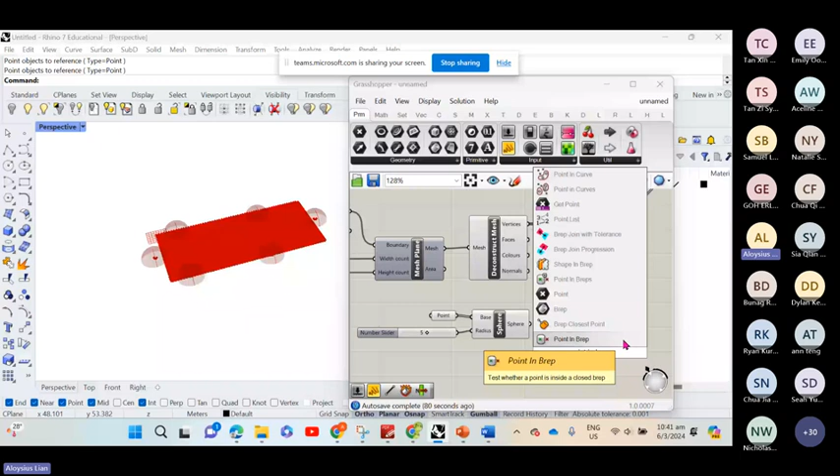Okay, Point In Brep. So our Brep will be the spheres, the ones that are covering them. And then the vertices are the points here, all the points that you want to test for.

Okay? And what it gives you is true or false. It will tell you whether they are in the BREP or not. So if it's not in the BREP, you will say false. If it's in the BREP, you will say true.

And this is again called data management because we are going to use a command called the dispatch command. Just now, our split list command tells the computer specifically from point 1 onwards, this one, this side, the other one, the other side. Okay? But dispatch means that it will take whatever is true in the first list, whatever is false in the other list.

Okay? It's just the same as this whole LT, right? I can either say from the first row onwards, all get A. Or I can split into boy and girl. Girl all get A, boy all fail. Okay? Understand the difference now between dispatch and split? Okay, so now what we will use is dispatch.

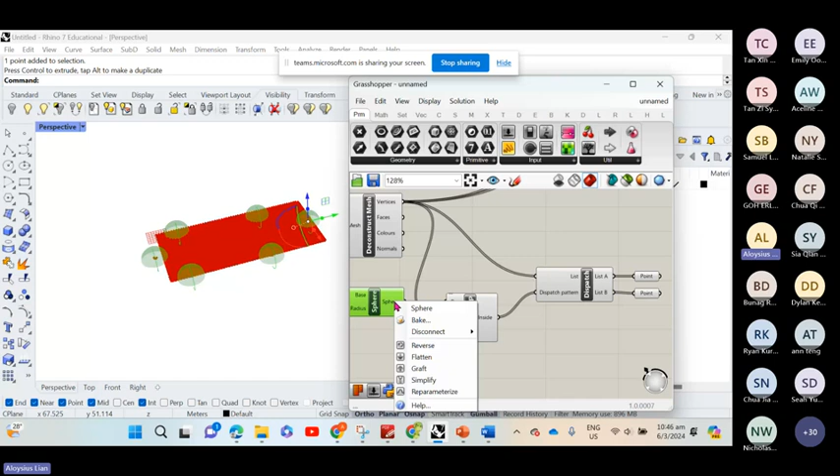Okay, so then you have these sets that will be our anchors. And then these ones that will be just the rest of the list. Okay. So for our Kangaroo, what we will need to do is we will need to establish your anchor, and then you will also need to get the edge length as well as the naked vertices.

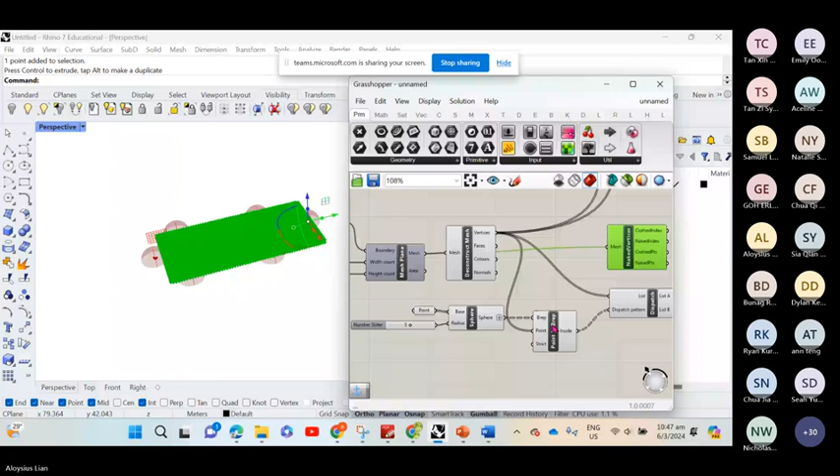Okay, so what we need to do now is we will use the naked vertices tool here. And we must connect this to the original mesh. Okay, so let's have our original mesh here from this mesh plane here to here. Okay. Let me try this without grafting here. Okay, I'm going to right click and graft it again. And I use my naked points instead. Yeah, I think this is better. Okay. So I'm just going to move this aside.

Okay. So now, instead of having all those here as a clump, I will take the naked points here. Let me just visualize for you with a point tool. So you see here, by using the naked vertices, you can isolate the points on the edge of the mesh. Naked means that they are not connected to another mesh point. That's what they mean by naked.

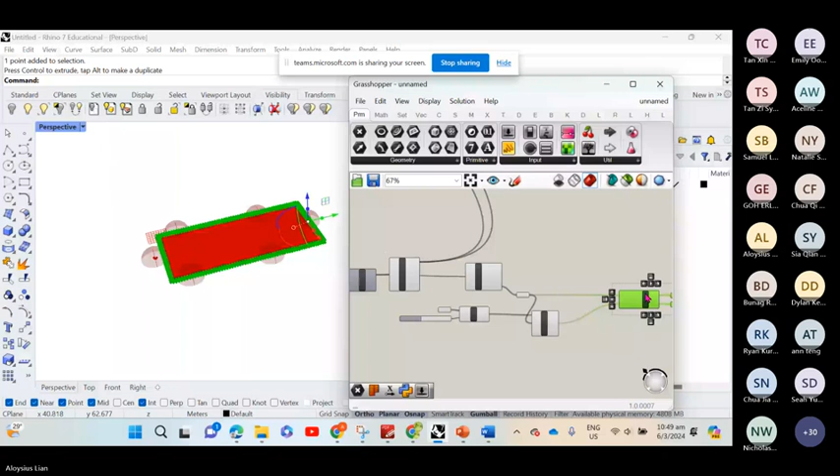Okay, so I'm going to connect this here now. And what is happening is with my points here, I create my sphere, and I will check whether or not they are within this naked list of points, and get these guys and these guys. Okay, so you have a set of points now, similar to here, set of points here. See, it's from naked points to the point in BREP.

Okay. So our next step, if you see from the reference command, is those are where we will point to as the anchors. But we also need to apply the loads, the edge lengths, and then we use the same analogy that we did before, which is to merge all these values together for our hands-on over here. Okay.

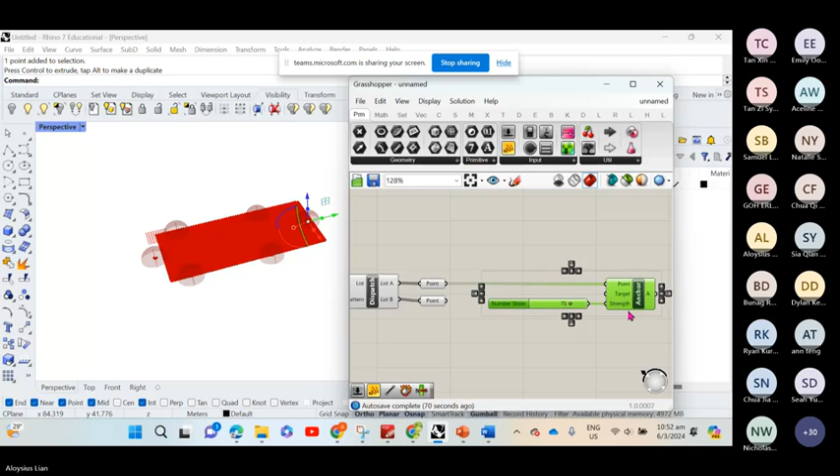So I'm just going to create the anchor now. ANCHOR. And choose anchor. Anchor XYZ is when you are more specific about how you want to fix your points. For example, if you use anchor XYZ, you can choose to anchor it only in the Z direction or only in the X direction. For us, we will just anchor it to every direction. And I'm just going to connect it to the anchored points here. And my strength, I will put to 75. You can play around with the values later on. Okay. So this is the anchor part.

Okay, so we have our anchors. And then we will need to use the edge length. Okay, set the edge length of a mesh. So you need the mesh. Your mesh will come from the original mesh that you have over here, from the mesh plane. So I'm just going to connect it and move it here.

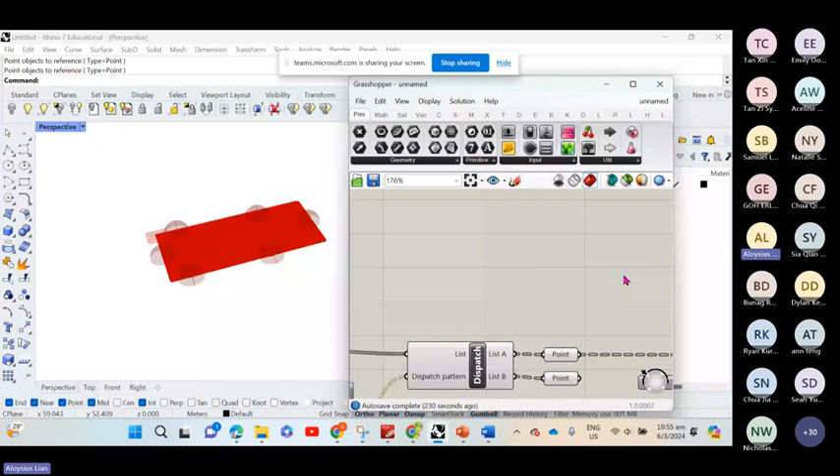Okay, to make it easier, I will just put it into a container so that I can push it everywhere. My mesh here, push my mesh here, and then now I can move this all the way to here. And I can connect my edge length to the mesh over here. My length factor, I'm going to put it as 0.15. This is just an arbitrary number. You can change it later on, and you will notice the difference in simulation. Okay, strength-wise, you can keep it as the default value.

Okay. Then the next thing that you need to do shall be the loads. So this is the one over here, load, L-O-A-D. So you need all your points, because you need to load all of this. All of these points over here.

So we go back to this one, so it should be the original points, which is all of your vertices points here. Okay. To connect here.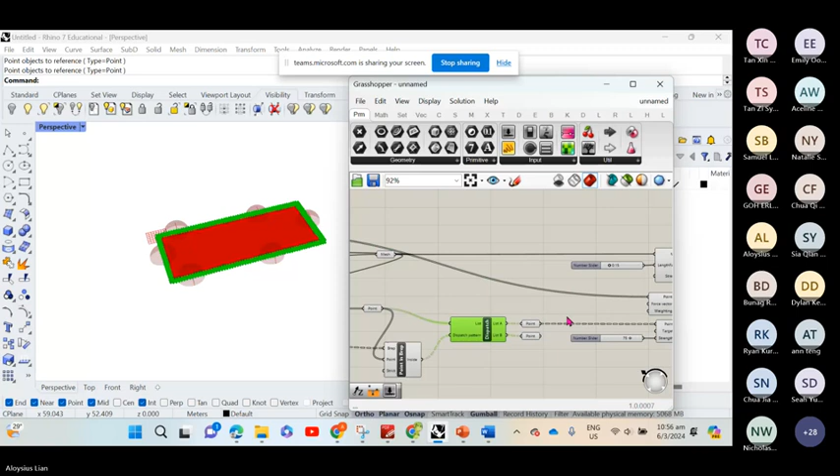And for the force vector, we will put it in the z direction because that's the up direction. And I'm going to create a slider from minus 0.9 to 0.9, because the units here are always in kilonewtons. So this will be negative 0.9 kilonewton. So that will be the downward gravity force.

Okay, then the last thing that you need to do is to show the mesh. This is just a Kangaroo element, which tells Kangaroo that you want to show the mesh geometry after you have done the simulation. So connect the mesh to show over here. Okay.

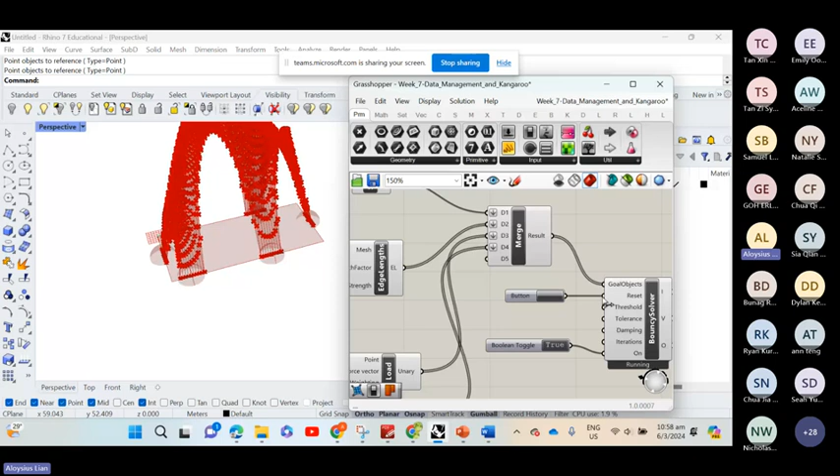So you have all these 4 elements here. We will repeat the same data management element that we have learned. You all don't have to follow exactly as per this. That's why I gave you all the reference file here. You can look at the reference file because otherwise you will squint too much onto the screen. You just understand the flow from what I'm doing now, but all the connections you reference from the canvas file. Okay.

Now we need to merge all of these values together. Merge. So I will start off with my mesh, my edge length, then my load, and finally my anchor. Okay. And the important thing is we have to flatten all of this information. You can see here they are all in different data structures, which is what we talked about in the early part of this morning. So I'm going to right click, flatten, right click, flatten, right click, flatten, right click, and flatten. Okay. So I flatten all of this information.

Okay, it has all of these goals. You have a load, you have the spring, you have the anchor. Then you will use the Kangaroo bouncy solver. Okay. And you connect this to the goal objects. Oops. And then you will have a toggle, right? Whether to turn it on or off. And then you have a button, whether you want to reset or not. Okay, I'll click it to true, and then I can reset it.

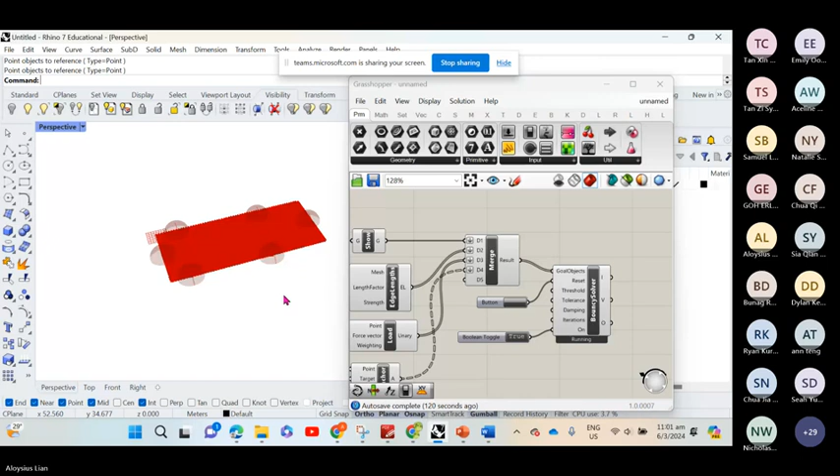Okay, it's there. Wait, let me just... okay. Okay, so this is too much, right? Okay, so there's too much force. I can always go back and change my force.

This one is like your grandma underwear.

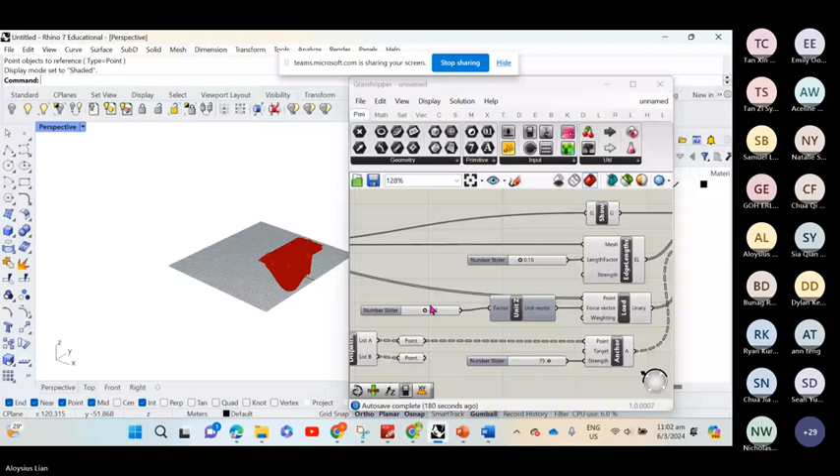Okay, you can adjust this. Okay, then become like that. Okay, something like this. So looks better. Okay, and with this, that's the cool thing about having it as a computational model, right? I can apply different kind of forces. I can make it go down. I can immediately make it go up. Whoa. Like this. And then I can move my point around.

So for example, your design studio, right? Your studio master say, hey, cannot make sense. Put here. Okay, then you put here. My entrance, I want to change my entrance to here. Okay, I change for you. Instantaneous result. You can also add more points, up to you. Okay, and it will update itself. Okay. So click on the button and you will reset.

You can play around with the length factors, right? If you reduce the length factor, you see what will happen. You will be more rigid. You increase, you will be more relaxed. Okay. So this is a quick way to do, what do you call it? Form finding exercises. Okay. A lot of your professors will say that this is just form finding. Yes.

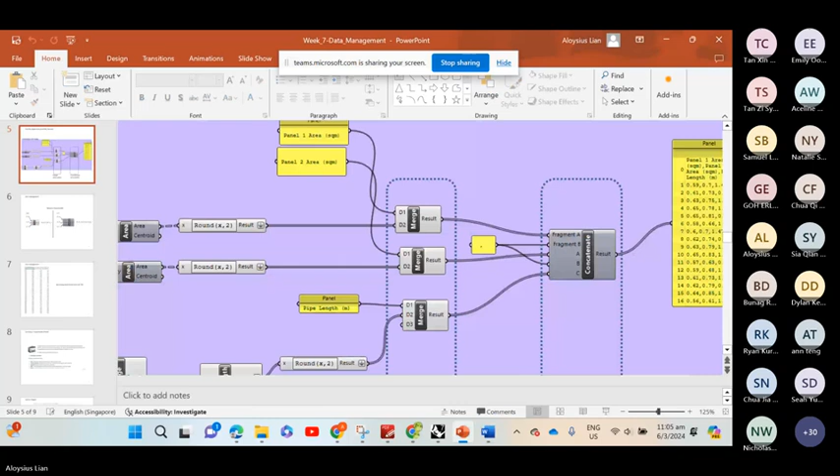Okay, so for the exercise today, essentially, you can choose to do it with the Esplanade tutorial, which is shown here, or you can do it through this Kangaroo thing. There is plenty of information that you can export from here. You can export, say, for example, the number of members that you have, or you can export the total.

This is the one that I've given to you all, in which later on I showed how to make the same thing again. Use the Deconstruct Brep tool to be able to create a diagrid system. And then after that, with that diagrid system, you can have your pipes. You can calculate the number of pipes with the List Length command. So you can output that as a CSV file, or

conversely, maybe for your exercise, instead of having your points being drawn in Grasshopper like this, you can read from a CSV file where all your anchor points are. And then that will go into your Grasshopper file, and it will determine where the locations of your anchors are. Okay? So there's a lot of flexibility for today's exercise.

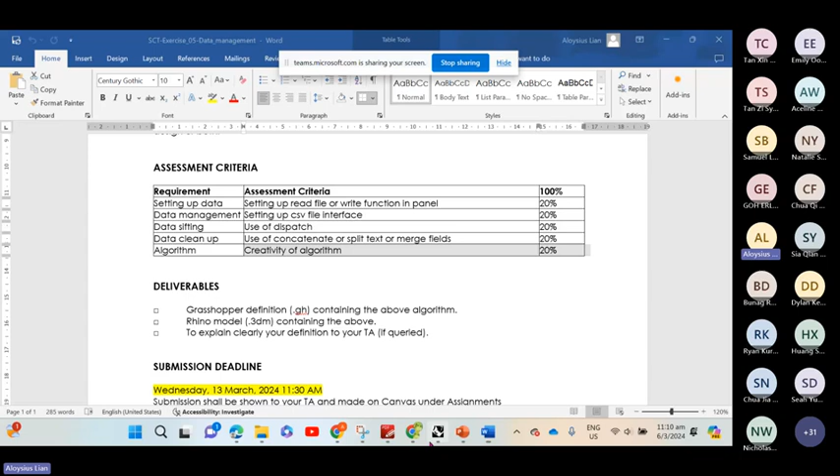Okay, any questions for the lecture cum hands-on today? Is the pace okay? Can understand? Can all at least complete the Kangaroo thing, the point thing? Okay, very good. The Kangaroo thing is actually quite straightforward. As long as you have show, edge length, load, and anchors, flatten all of them, it will definitely work. It may not necessarily be all these points. You can, as I said, choose the points in CSV.

But the bulk of the lesson and the importance of the lesson is in the data management on top, because that will help you very much in future for your computational design understanding. Okay, if you all have no further questions, you can take your time to go to your TA portion. As I said, today there's no mandatory submission, but if you already finished your exercise and you want to submit, you can also submit. It's open for submission.

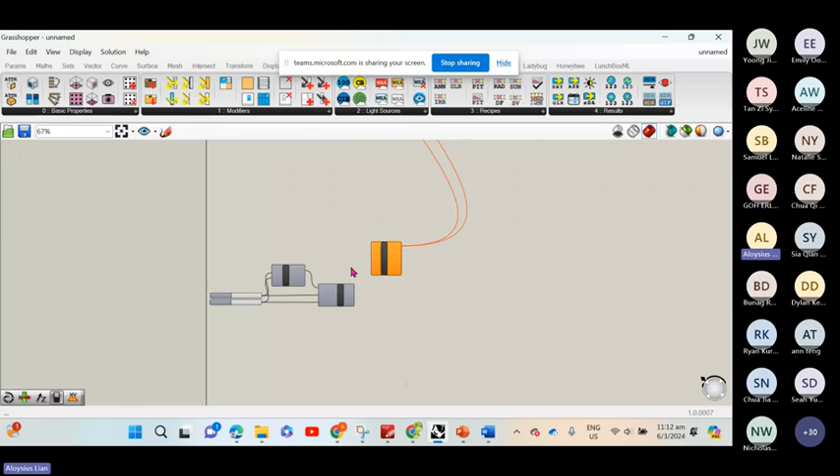Okay. Those here who are confident can go off. Those online, I will show again. Let me open this and maximize this. This one, right? I just do like that. Oh, you have to apply to. Okay. From here onwards, delete. You have to do something slightly different.

I start from this point onwards where we have the rectangle. Then we have the mesh plane, like this, in the Esplanade tutorial, or this one is today's tutorial. So you can either generate a new design from here onward. Okay.

So what I will do to be clean, right? I will just type mesh container. Okay, I will just have a container here so that I can move it around later on. I'll connect this to the deconstruct mesh. Okay, so there is just a connection here so that I can move this around freely later on.

The first thing that we need to do now is to get the naked vertices. Okay, so with this mesh connected to the naked vertices, right, I want to isolate the naked points. So I will use a point tool here and get the point. Now I'm going to minimize this and I'll show you why I did this. So this is why I have the edge points here, all of these points.

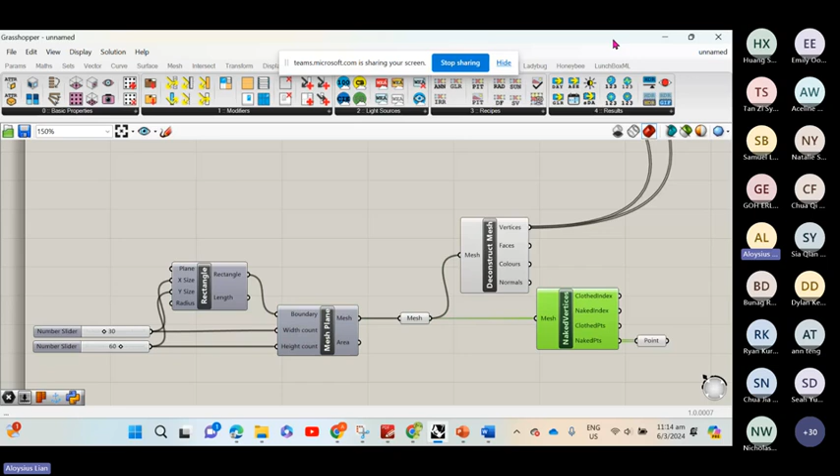Edge. Okay, from mesh to mesh, and we want to take the naked vertices here. So the naked vertices here are corresponding to all of these points here on the outside. On the outside. Do you understand now?

Charlotte, do you understand?

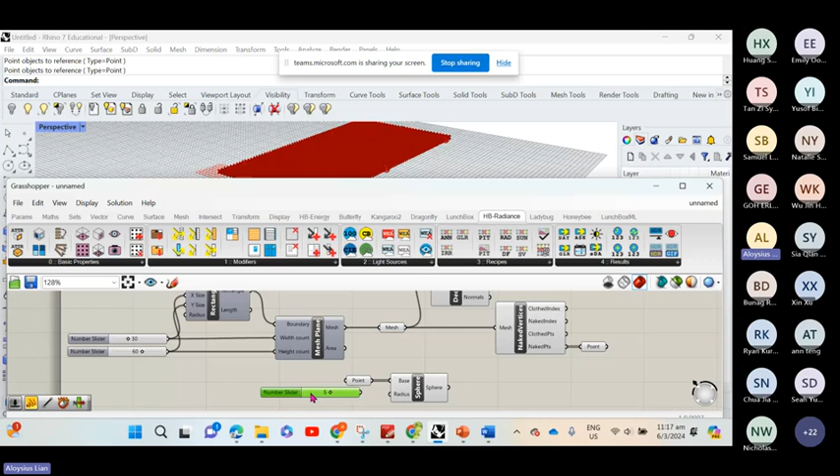Then I made these points into a sphere. Okay, so these are all the points in this sphere. And I created a radius of 5 meters for the sphere so that it's bigger, right? I want to affect more points on my naked points.

Okay. So now what I want to do is I want to test whether or not the point is in the Brep. Right? All these edge points, whether or not they are inside of this sphere. So I will connect my point over here and then my sphere over to the Brep. That's how I will get all of this true and false.

So to literally split up the list, I will need to use a dispatch command. Take the list, the original list from the point here, and put it to the pattern here. Right. So to see this, I need to use my point command again to distinguish between this and this. Okay, so these ones are the points affected.

Okay, you can see that now it's only affecting one sphere. So I need to right click on this and graft all of the spheres to influence every single point in the Brep of the naked points, of all the edge points.

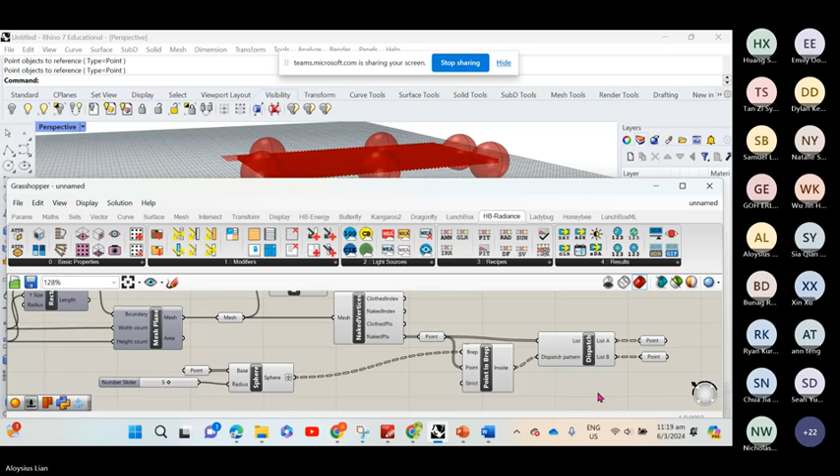So with these points, we will set them as the anchors. Okay. And then my strength will be 75, which you can change later on. I will also need to apply a load to them, right? So all these loads must be connected to all of the points. Okay. So it's to all of the points, not to the edge points, to all of the points. So that has to be from all the vertices.

And the force vector is in the z direction because we want it to either be up or down. And I created a value from negative 0.9 to 0.9. So this will be all the loads. The next thing we need to explain is the edge length. Right, the edge length you will take from the mesh. See this mesh over here. And the length factor, I can put it as 0.15.

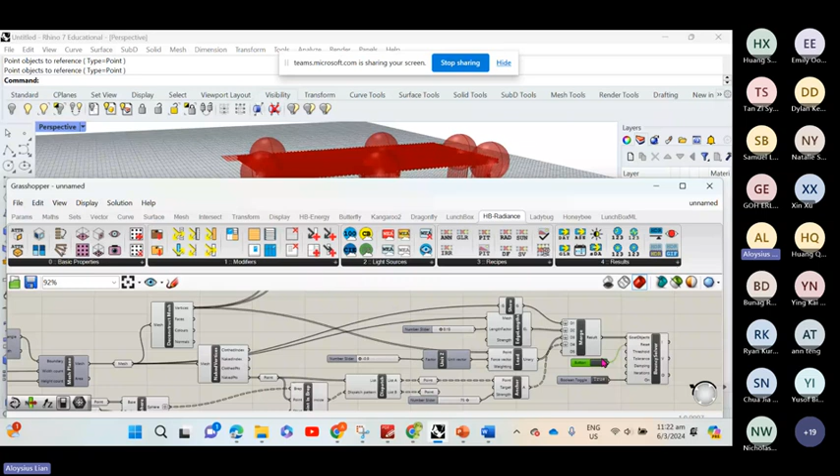Right, so I can change this value to be another value. You can see it's doing a different thing, right? I can adjust this and it will flip up.